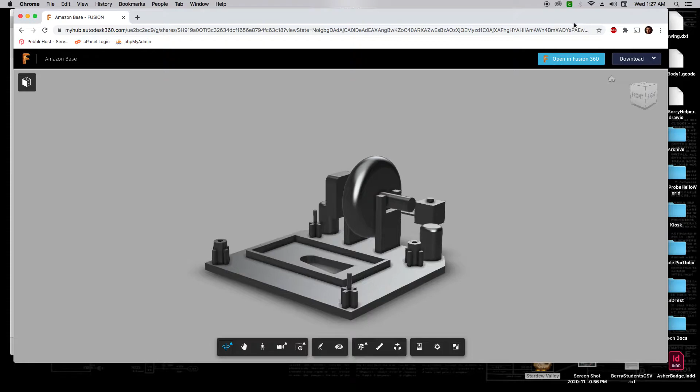Okay, so this is a quick tutorial on how to create a custom mouse body for an Amazon mouse. We're going to do this in Fusion 360, and to get started, we're actually going to go and download a model of an internal clip and hardware for the circuitry that will come out of the Amazon mouse that we're going to be working around.

And so what we'll do is we'll go ahead and click Open in Fusion 360, and this will load this file into Fusion so we can begin to design our body around it. Okay, so once we have this in here, we are going to be designing the body of our mouse around this, and so we're going to start off by creating a form, and we're going to use the box tool, and we will create it along this bottom plane.

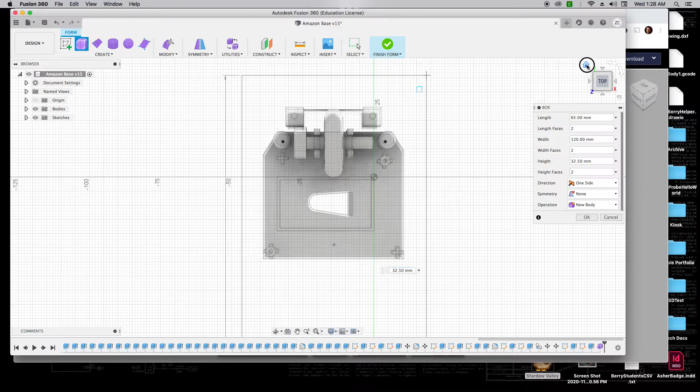And I'm going to try to center it as best as I can, but it may not be perfect, and that's okay. Okay, I'm going to come down here. Okay. And we're going to work with some rough dimensions. So we're going to make this 65 wide, and we can always pare this down, and we'll make it 120 millimeters long. And we'll make this height 32.5 millimeters tall.

Okay. So here you can see we've kind of got the beginnings of our shape here, but we want to understand how it's going to relate to our hardware, and so we're going to do a little bit of positioning around here, and obviously some modification of this overall shape. A couple things we're going to keep in mind: we can see how this kind of curves in down like this. We're actually going to flatten this off, and so we're going to lose a little bit of that height. And we're going to modify this shape to make it a little bit more ergonomic as well.

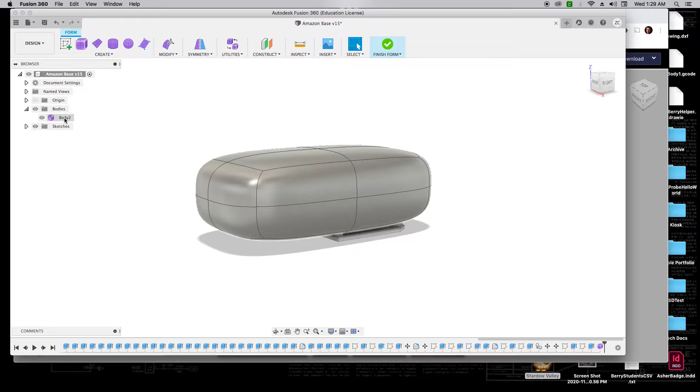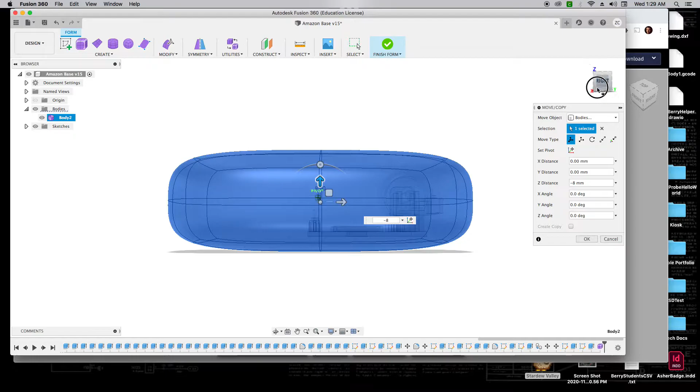So the first thing I'm going to do is open up these bodies, right click here on body, and change the opacity to about 80%, and that's going to show me the relative position here of the object that I'm working with. And so I'm going to move it down a little bit because I want to make sure that I have the internals completely inside. And so I'm going to position this, and again, I want to make sure that this is going to be where I'm going to be cutting it off and making it flat. At the same time, making sure that I've got lots of room on all edges for the various parts of this to poke through. So that looks okay.

Let's make sure we're at least roughly center. Looks like I can move this over just a hair to make it more center. Oop. I actually need to go in that direction. Okay, and that's looking a little bit better there. Okay, so I've got that positioned in a place where I think that's going to work okay.

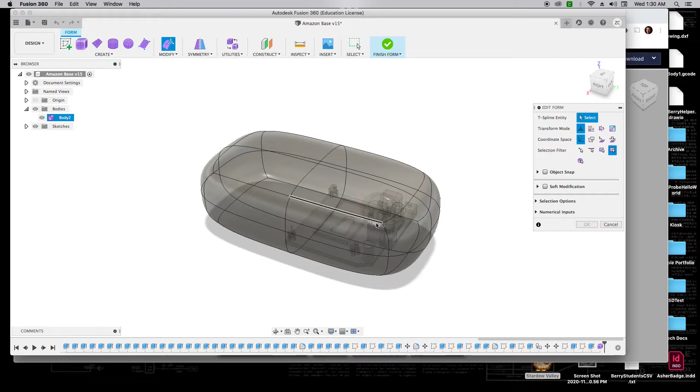Okay, now what we can do is we can go ahead and modify our form. And with this, we're going to begin to pinch and pull along the edges to create a shape that we think is going to work best for us. So you can see I'm going to taper this edge down here, and I'm going to do mine symmetrically. So if I move something on that side, I'm going to move it on that side as well to keep it nice and symmetrical.

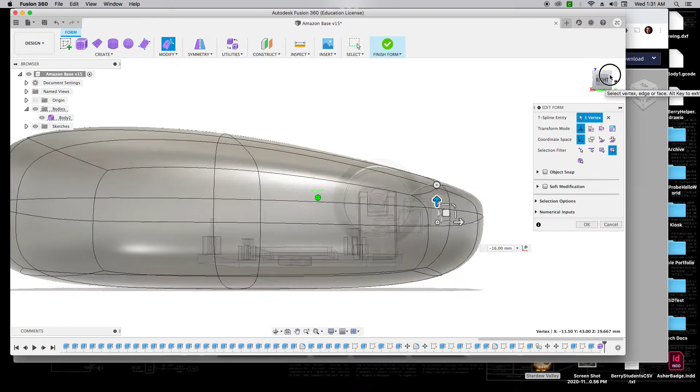Okay, so I'm going to move this down a little bit more, and you can see that the scroll bar on this is pushing through just a bit. Okay, and I want that to be just barely protruding, and I also want to make sure that I'm leaving plenty of space for the various aspects of this mouse to come through. So I'm going to bring that up just a bit more because I can see that there's a piece of the mouse here that's going to be getting close to the edge, and again, I want to make sure that there's going to be plenty of space for that, and also this doesn't have to be protruding an awful lot in order to be effective.

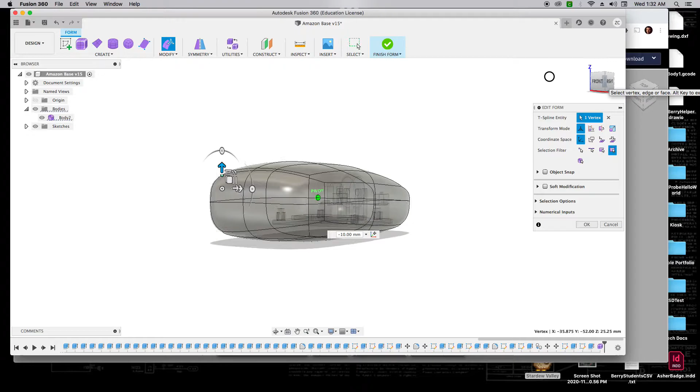Okay, so that's looking okay. So again, just constantly looking around, making sure that everything's going to fit the way that I think it should. Okay, let's take a look at our mouse. So a couple things. I'm going to play around with this, and again, just thinking about various elements of ergonomics and what I think is going to fit my hand best. So I'm going to curve this down and make it sloping. And I'm also going to push this in just a bit and contour it just a bit.

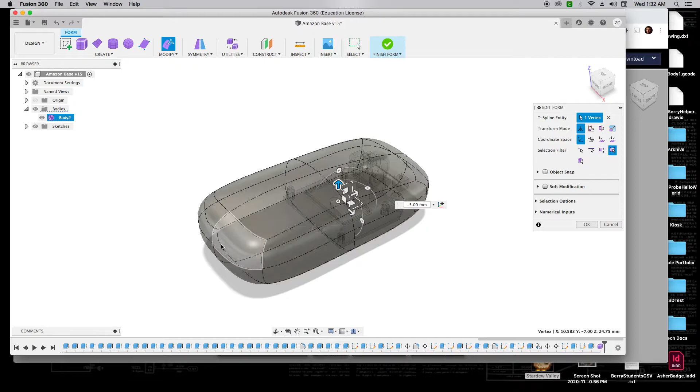Okay. So I'm liking the way that this is coming along. So I'm going to click OK here. And at this point I can finish my form. And here we can see that I've got the overall shape of my mouse. Of course, we're going to flatten off this bottom edge so it sits flat on a desk. Again, you can play with this. You can think about the particular application that you're using and make contour choices based on that. But this is a good basic start.

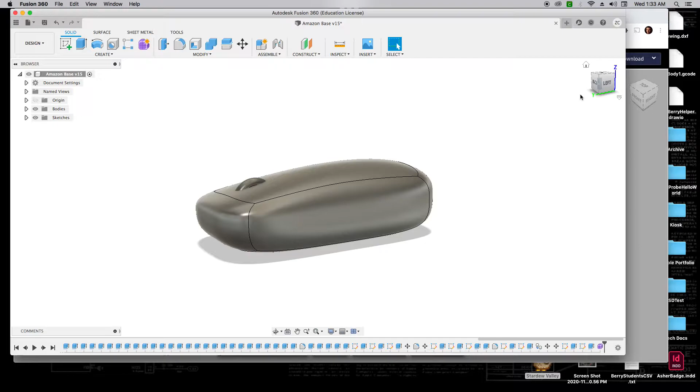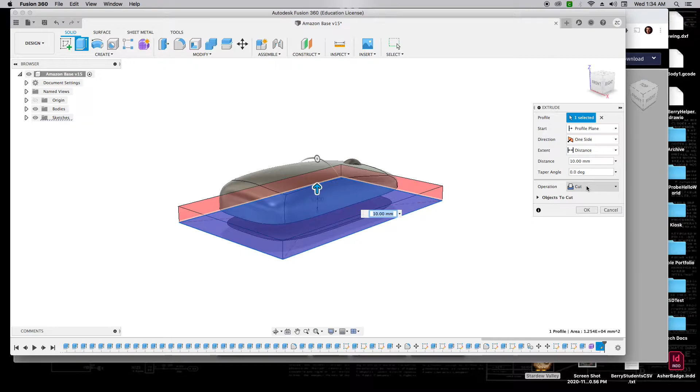So now what we want to do is flatten out the underside of this. The way we're going to do this is by creating just a big old rectangle that's going to serve as a flat base. So we can hit R for the rectangle tool. We can come into here, and I'm going to create a center point rectangle and just make it oversized for this. And then I'm going to extrude it up. And I don't want to cut this just yet. I want to make this a new body because I want to be able to make some more informed, precise choices as to just how much of this I want to cut.

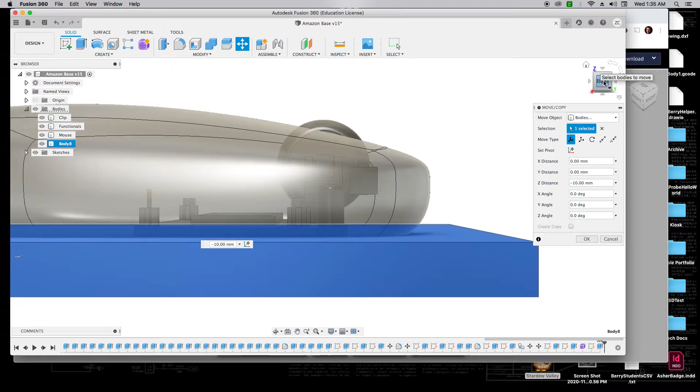So I'm going to go back into my body, this is going to be our mouse. I want to see what's going on the inside, so I'm going to make it a little bit transparent. And I'm going to select here and hit M for move, and move this down a little bit. Really what I'm looking for is to make the base of the mouse pretty much on the same plane as this base here. And we can see that we're actually pretty in line with that right there, so that's going to be a good position for it.

So now I can go to combine, and I can select this as my target body. This is my tool body, and I can click cut, and we don't need to keep the tools, so we can unclick that if it's checked, and click OK. And at this point we can see that we have trimmed the bottom of the mouse, so it's nice and flat, and should sit on a desktop quite nicely.

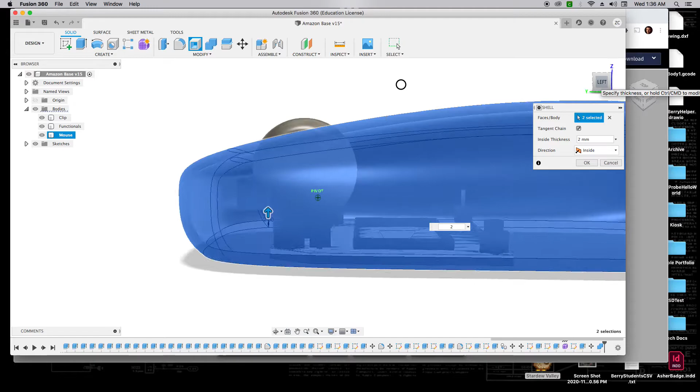Okay, now this is still a solid object, so we do need to hollow it out. We can do that using the shell tool, so I'm going to select both the mouse body and the base, and we're going to shell it. We're going to start thick, let's shell it to 2 millimeters. But as I'm doing that, I want to make sure I'm looking around here and that nothing's going to run into that. And here I can see it does look like this little roller connector is going to intersect with that, so maybe 1.5 will make that a little less dramatic. And so if I click OK, yeah, it looks like it's just clearing it. Okay, so that's good.

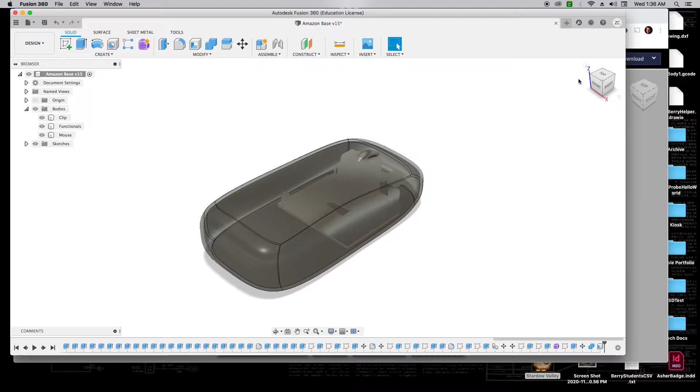So now it's hollow on the inside, but it's not in two pieces. We need to do that. So the next thing we're going to do is create a rectangle that we're going to use to slice this into two pieces, a top piece and a bottom piece. So again, we'll hit our rectangle tool. We can choose our bottom here. And I like to use these center rectangles just because it makes it easy to get it wrapped around. And again, this can be just about any size.

We'll finish our sketch, and I'm going to extrude that up using the E tool. I just need to extrude this 1 millimeter and make it a new body. So again, I'll click OK. Just like we did before, we're going to be moving this, so I'll click on this and click M.

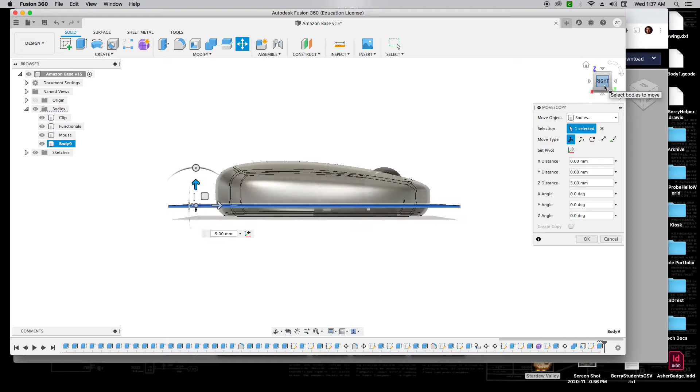And I'm going to be, again, trying to find a good line where I want this to split. Now, one choice that I might make this around is where I want the wire to come out of the front, and we want that to be relatively low, just based on where the circuitry is. And so I'm okay with splitting it right there.

At this point, we can choose to split the body. We'll choose this as the body to split. The splitting tool is going to be the face of our rectangle here. And we do want to have that Extend Splitting Tools option selected. If I click OK, it didn't look like it necessarily did anything, but I can now see that I've got a mouse and a mouse one.

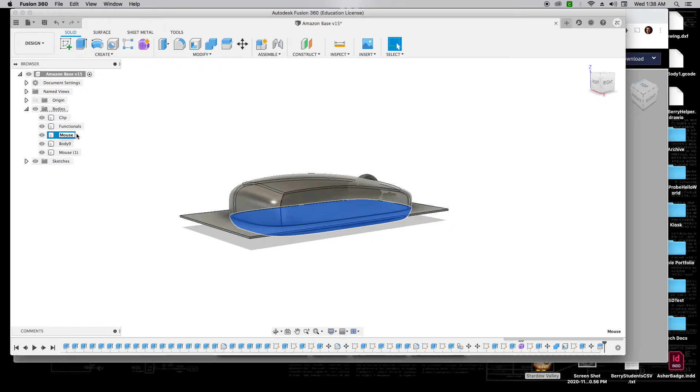If I hover over here, it shows the bottom. So I can change the name of this to mouse bottom, and I can change the name of this to mouse top. Now at this point, I don't really need this anymore. Now I'm going to turn these on. I can see that I've got my mouse bottom. That's what the bottom of the mouse is going to look like. And I can turn on the mouse top, and I've got the mouse top here.

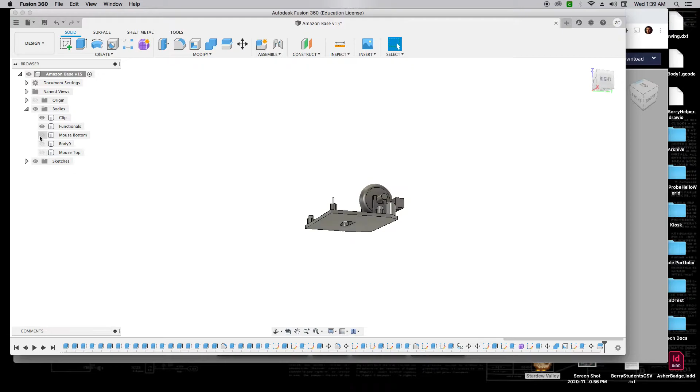So let's start working with our components here. I do want to have the clip part actually merge with the mouse bottom. Ideally, I would like this clip and this mouse bottom to be the same. This little area right here is a window that needs to see through, and you'll notice it's kind of blocked by the mouse bottom at the moment.

So I'm going to turn off the clip so that we're just looking at the bottom, and I'm going to make an oversized hole here that's going to merge with the clip. I'm going to go to rectangle, sketch on this face, and again, a center rectangle. I'm just going to make something that is oversized, but big enough to fit that mouse window through. And so I'm going to hit E for extrude.

I'm going to cut up through the center, and you can see it's just going to make this big, giant hole here. But if I turn the clip back on, it should be okay. It should mostly get filled in. As long as this window is completely unobstructed, then we'll be in good shape.

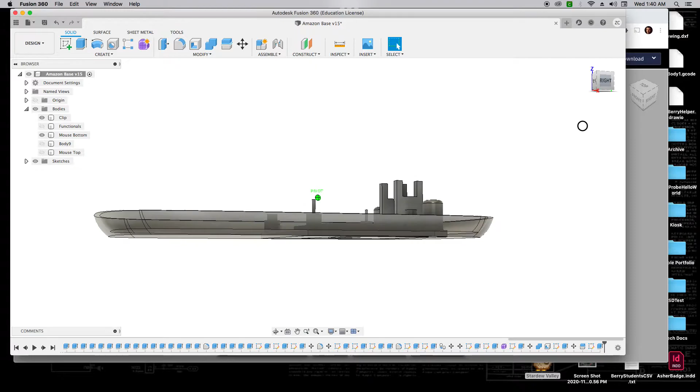Now at this point, we can combine these two together. Again, we'll use our Combine tool and our target body and our tool body. Instead of cut, we'll do a join. If we join those, we should find that they turn into a single solid piece. And at this point, we can go to opacity control, change it to 100%, and that should be the bottom of our mouse, all ready to go.

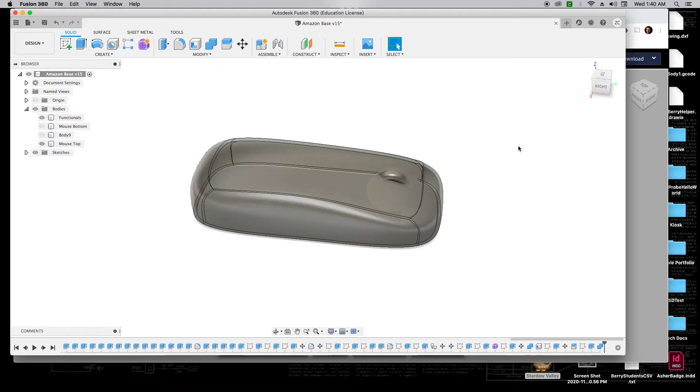That being said, we still have to deal with the top of our mouse and make sure that it interacts correctly with the scroll wheel and the buttons. So let's get started with that. The next thing we're going to do is carve out an appropriately sized hole for the scroll wheel in the top.

To do that, we can use our Combine tool. This is our target body. Our tool body is the scroll wheel. We want to make this a cut, and we definitely want to keep the tools. We're going to be using this stuff a little bit later on. So if we click OK and turn off the functionals, we should see now that we've got a hole that is perfectly sized for the scroll wheel.

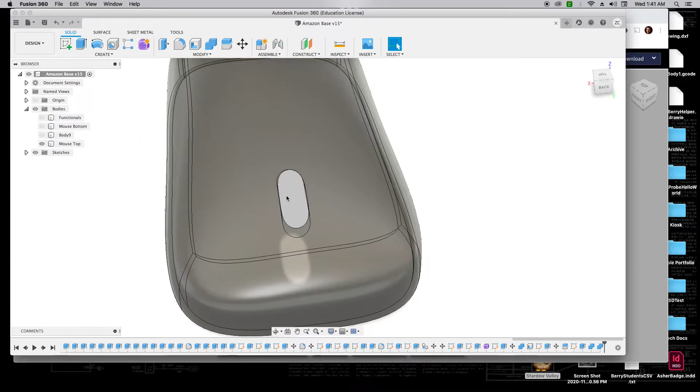However, since that scroll wheel does need to move, we need to open this up a little bit, so it's got a little bit of space on each side in order to be able to not get caught on the edges. And so to do that, I'm going to zoom in here, and I'm going to choose this Press Pull tool, and then come through and select each of these faces, and there are 4 of them, so you may have to maneuver around to find them.

Okay, but here you can see I've got the entire area selected. Okay, and I want to widen this out a little bit. And so if I bring this up here, I'm going to widen mine to, we'll say, 2 millimeters. That'll allow for any kind of small adjustments to be made. And you can always go back if this doesn't print correctly. You can always go back and fix this. But I'm going to err on the side of making it a little bit wider and go to 2 millimeters.

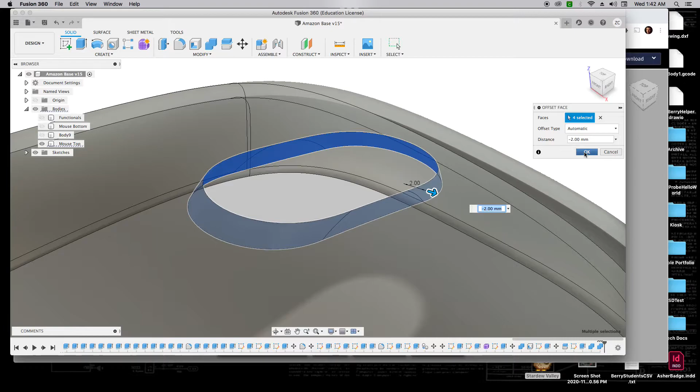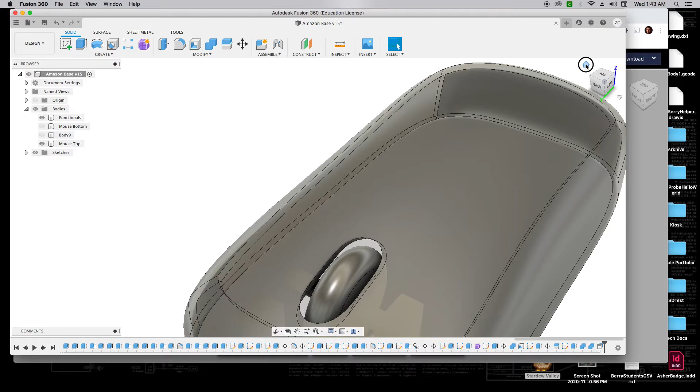And click OK. And so now we'll turn our functionals back on. And we can see we've definitely got a lot of clearance. Well, in retrospect, that's too much clearance. So I'm going to go back and change that up. So we click Press Pull here, here, here, and here. Okay, turn my functionals back on. And I'm going to go negative 1.5. Okay, I'm feeling better about that. So, yeah, I think that looks okay.

Okay, great. Now, at this point, we need to do a couple of things. We can start working on our buttons now. But you'll notice right now we don't have any separation. So if you push on this, it's a solid piece. So it's not actually going to move up or down. And so what I'd like to do is actually split the face of this in a couple areas to create a relief that allows you to push down on just one side of the mouse in order to engage with these buttons below.

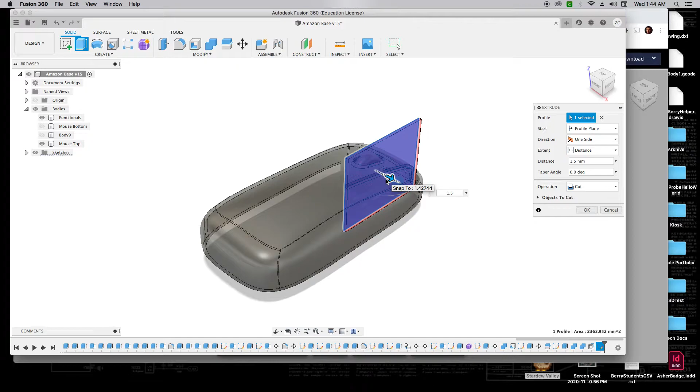So to do that, again, we'll do a couple of small things. I'm going to create a new rectangle. And this time I'm going to create it along this face, going up and down. And I'm just going to make it arbitrarily sized. And I'm going to extrude it. And I need to think through how much I want to extrude it. I'm going to start off with maybe 1.5 millimeters. We're going to create that as a new body.

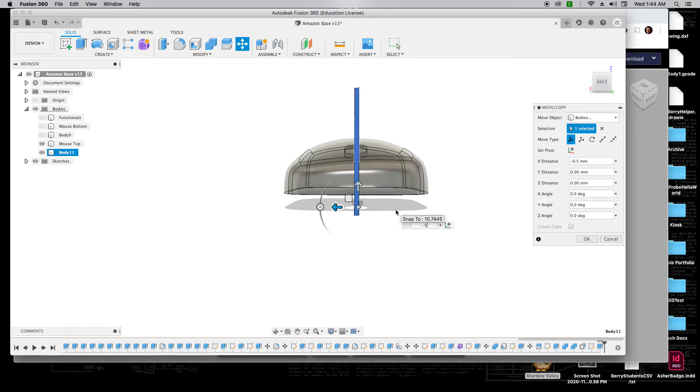Okay. And now what I want to do is position this to just run right along this edge here. I'm going to turn the functionals off for now, but I'll click this and hit move. And I want to get a nice top-down view to center this up. Okay, and I'm going to move it down this way, because what I should be looking for is to split this edge right here. So if I'm looking at it pretty straight on, it looks like I need to move it just this way, just a hair. Okay, negative 0.5. There we go. Okay, so I'm liking the way that looks.

Okay, so now what we can do is, again, we can combine. Here's our target body. Here's our tool body. We do want to cut, and we don't need to keep this tool, and so we can click OK. And at this point, you can see that we've split it along this edge, and that'll allow some separation between the left button and the right button. Now what we need to do is create a relief along the sides so that, again, this button can push down a little bit.

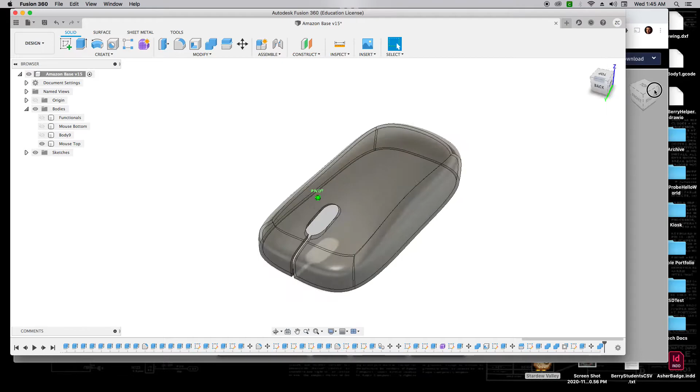So once again, we'll create a rectangle, and I'm going to create it along this face. Again, just draw it out to an arbitrary size, and we're going to extrude it out. In this case, I'm going to do this one 1 millimeter. We'll create that as a new body, and click OK, and we're going to move it.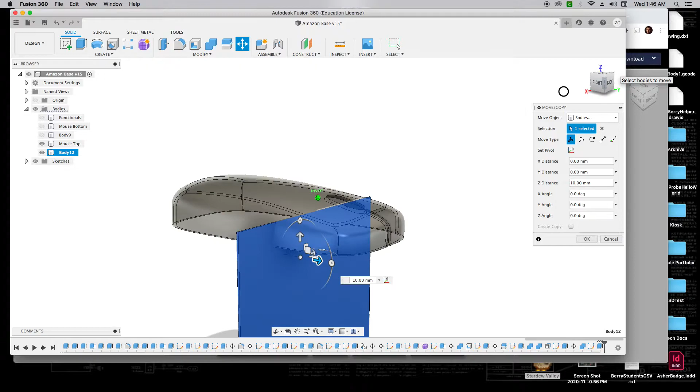And we need to decide how far in we want to cut. It doesn't need to be super far in, but we need to decide how far up and how far back from the front. So I'm choosing mine to cut right about here. You can look and see how that looks. Yeah, that seems to be okay.

I think that'll give it enough flex. So again, we'll combine our target body, our tool body, and cut. We don't need to keep the tools. If we click OK, you can see we've made these little relief cuts so that when you push down on this, there's enough flexion to engage with the buttons below.

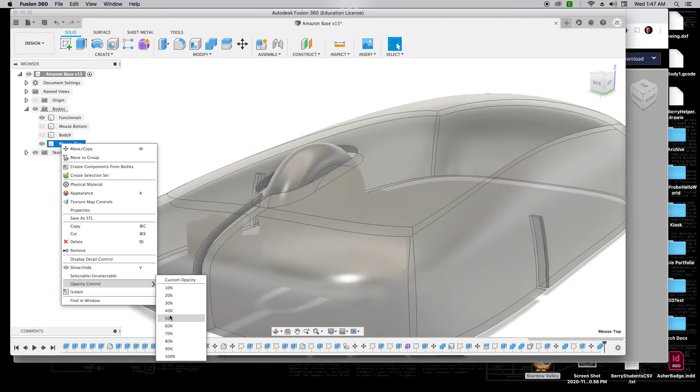Okay, now at this point we need to add some geometry to actually hit those buttons down below. So we're going to turn the functionals back on. We can see, if we look through the surface here, I'm going to decrease the opacity even more, to something like 50%. We can see that you can push down all you want, but it's not actually going to hit this button too much.

We need to create some geometry there that will allow it to, almost like a little finger coming down from the top, to actually push on the button. So to do that, I'm going to turn the mouse body off for now, and extrude the tops of these up. I'm just going to pick an arbitrary number, we'll say 15 millimeters, and create that as a new body, and click OK.

At that point, I can turn off the functionals and turn the mouse top back on, and this allows me to see whereabouts those little fingers need to come through. But obviously they're poking up through the body of the mouse, and that's not any good.

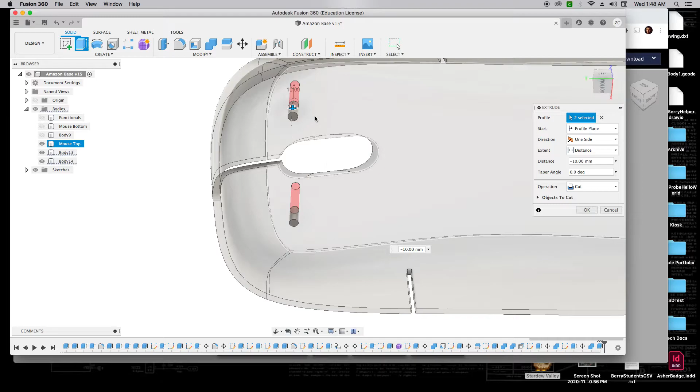So what we're going to do is extrude these back down. I'll hit E for extrude, and we're going to trim them down until they are inside the surface of the mouse. They need to be below the top surface, but also above the bottom surface of the mouse here. So if I click OK...

Oops, hold on, I did not want to cut. Let's try that again. So, here. Okay, so we're going to lower them down again. Okay, that looks like it's there.

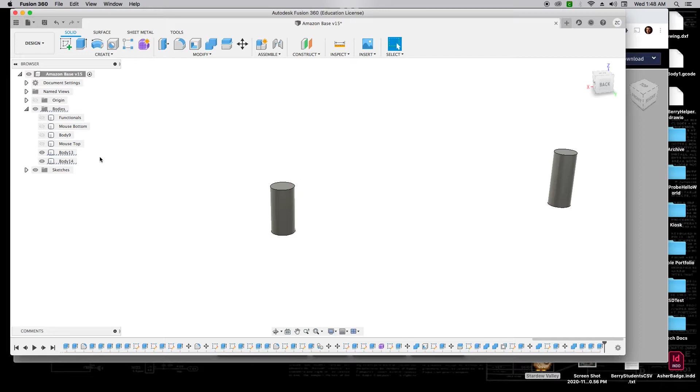We need to turn the mouse top off for this. We'll click OK. Now we can turn the mouse top back on. Okay, and it looks like, if I'm not mistaken, that one's still poking through just a little bit, and we don't want that. So I'm going to do the same operation again, and bring this down a millimeter, and we'll bring this one down a millimeter too, just to see if that works out nicely and evenly. Put the mouse top back on.

Okay, I can see that one's intersecting. Let's see, is that one intersecting? Let's look on the inside. Yep, looks like they're both touching. Oh, looks like they're both not touching.

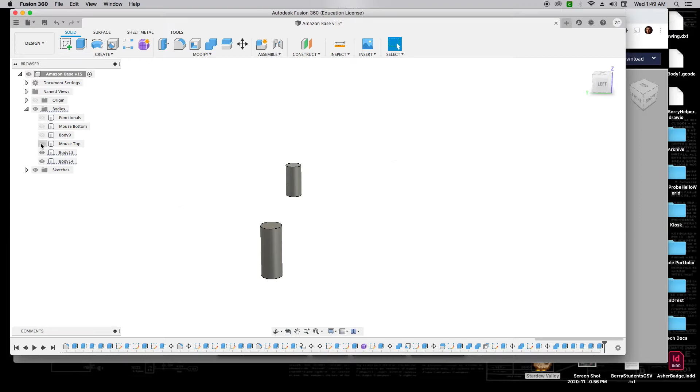Okay, so we need to raise this one up just a bit more. Looks like it was a bad idea to bring that one down as well. Okay, let's try that again. Okay, looks like we're back in business.

So now what we can do is go ahead and join these. Again, we'll click Combine, we'll click our mouse top, our tool bodies are here, and we want to join them up. Okay, and now they are connected, so I can turn the opacity on this back to 100%, and I can see that I have my two little fingers there. I am going to increase the size of these.

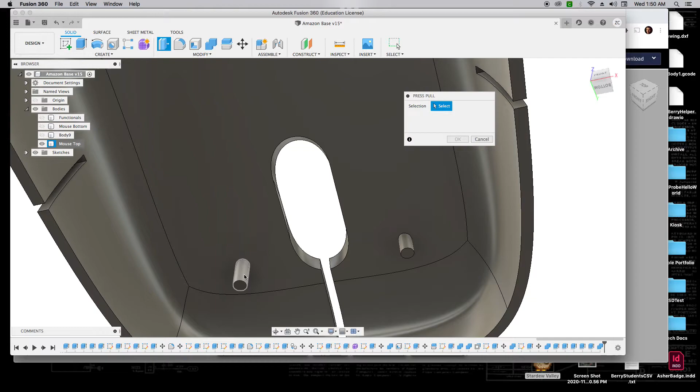To do that, we're going to use the Press Pull tool. Again, I'm going to select the outer edges of these and just widen them up a little bit. Let's go an additional 1.5 millimeters. Okay, so that's going to make them a little bit chunkier so that it's really hard for them to miss.

And so now if I click on the functionals and I'm going to drop the opacity, what I should see is that when you push down on those, you can see those little fingers are going to engage those buttons right there. Okay, so that's looking pretty good there.

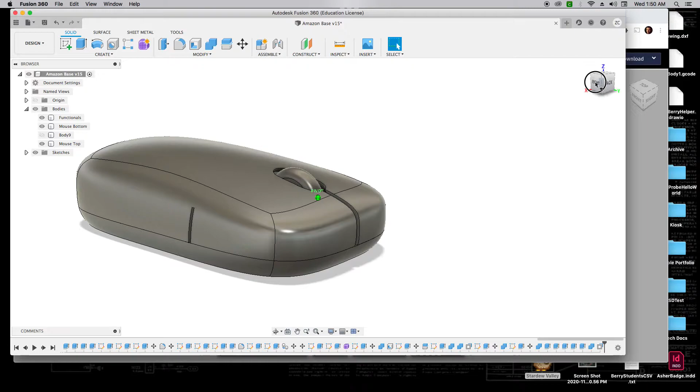Okay, now at this point, we're going to bring our mouse bottom back in, because what we'd like to do is carve some geometry here that's going to allow the cord to pass through. So to do that, we're going to model that cord just a little bit. I'm going to use the circle tool on this plane.

And again, I'm just going to create a circle. This time, I'm going to measure the cord on my mouse, and it looks like that's coming in around 3 millimeters. So that sounds good. Let's make it 3 millimeters, and I'm going to extrude this out, again, to kind of an arbitrary length.

Okay, now at this point, I want to move that. So I'll choose this one, click M, and I'm going to bring it forward. Let's bring it across, forward still. And I'm going to put it in the spot where I ideally would really like my mouse cord to come through. Okay, so maybe down a little bit.

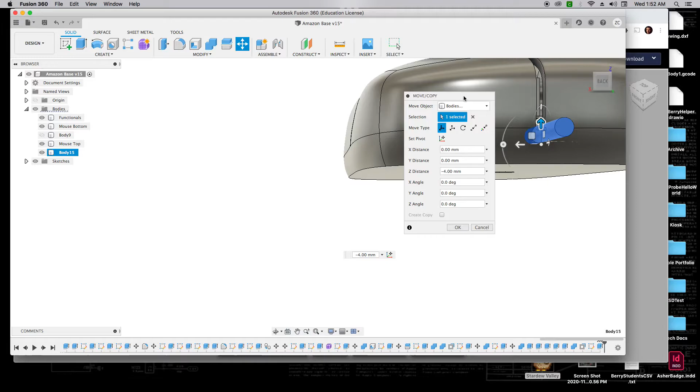Okay, bring it down just a bit more. Okay, so I like that right there.

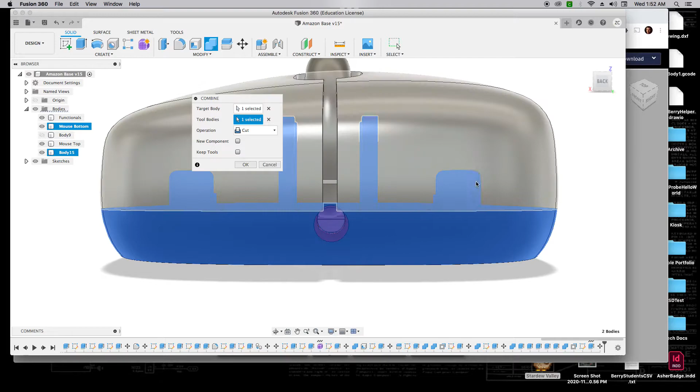Okay, now at this point, I'm going to have the mouse bottom, and we're going to cut that away to make a nice little circular hole there, and click OK. And so now we can see how the mouse cord's going to come right through there.

Now again, we've got a little bit of a problem. Now that we've got both of these together, we can see that when you click down on this, there's actually no room for this bottom finger to flex at all because it's going to hit the bottom of the mouse. But again, that's okay. We can turn off the bottom of the mouse.

And what we can do is, using the press pull tool again, we're going to select this face and this face, and we're actually going to cut up into it 1 millimeter. So if we click OK, then we turn our mouse bottom back on. Now we can see that there's actually a little bit of space here for when you push down on this for it to actually click down.

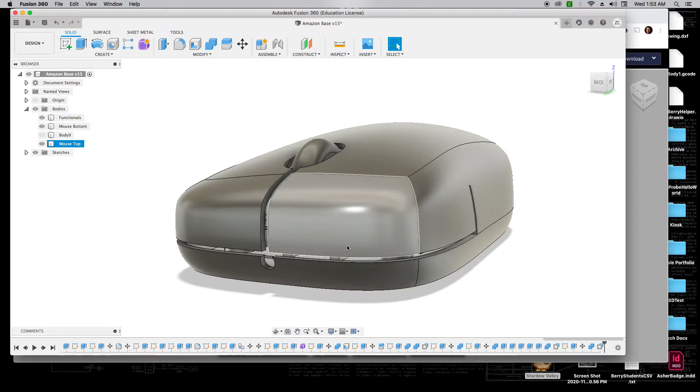Okay, so we're getting pretty close here. The only thing left to think about is how do we actually go about attaching these two things together. There's lots of options that we can use. I'm going to use just some small clips as well as a screw. And so we will work on making those two work together, and we should be in good shape as soon as we're done with that.

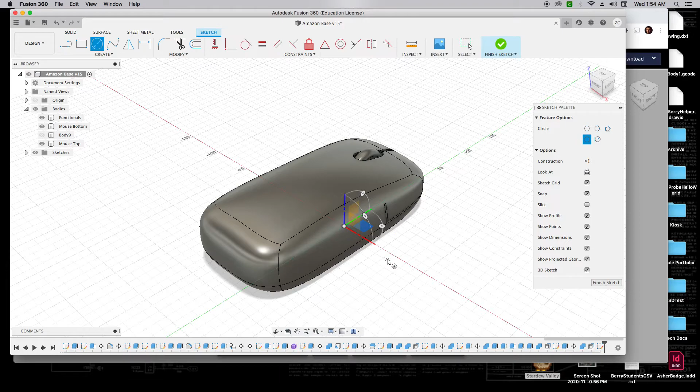Okay, so we're going to come over here. The first thing we're going to start on is with a screw, and we're going to run the screw right through the base here, and then we'll use some clips to keep everything nice and centered. So to do that, we're going to create a circle on this base plane, and that circle—we know that the screw we're going to be using has a 3 millimeter diameter, so I'm just going to double that for the post that's going to hold it together.

And so we'll make that 6 millimeters, and again, I'm going to extrude that up and make it of just an oversized length. We'll trim that up here in just a second, but something that's definitely going to run the full length.

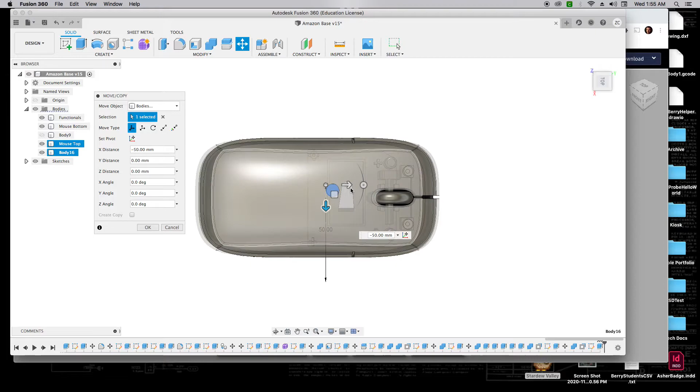Okay, once again, I'm going to move the opacity of these. I want to be able to see where I'm positioning this and where it's going. So I'm going to come over here to the mouse, and I'm going to move it here. I don't want it to interfere with anything going on this side, and so I'd really like it to be hanging out here in the back. It can be relatively close, but we just want to make sure that it doesn't get in the way of anything that's going on there.

So that looks like it's in a kind of good solid spot, so we can go ahead and click OK. I do want to make sure that it is positioned well here. Okay, good. And I'm going to just drop its height down just a bit.

I'm going to do that with the move tool. I'll select that, and move it down just a bit, so it's below the surface here. Okay, that's looking good. We can see it's actually kind of poking its way through there, and that's okay. We'll take care of that in just a moment.

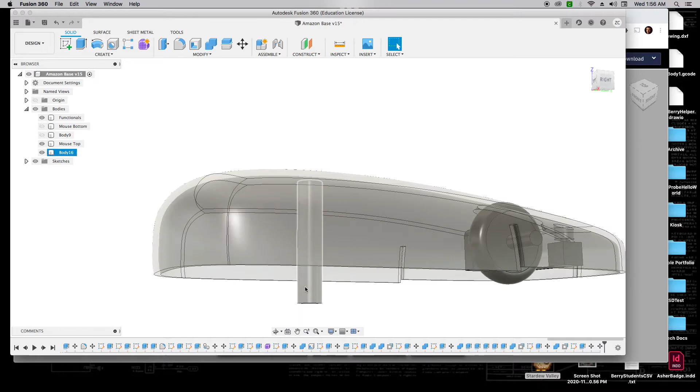I'm going to turn the bottom of the mouse off, and click extrude, and bring this up about this much. We'll click OK, turn the mouse bottom back on. Okay, there, and we can see that it's not actually touching that space anymore, and that's okay. That's exactly what we want.

Now at this point, what we want to do is duplicate this and move it down, because we're going to have a post that's going through the top and a post that's going through the bottom. So for this, we'll click here again, click move, and we're going to move this down.

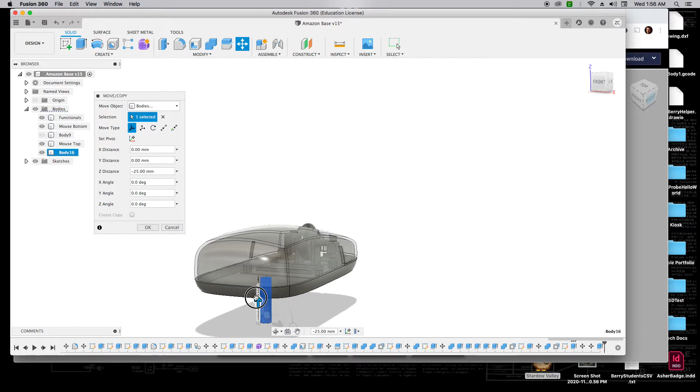Actually, we're going to try that again. You can click this body, click move, but this time I need to create a copy because I actually want two of these. Okay, and this time I want to position it so that they are just touching each other, and that's good right there.

Okay, so now we've got one that's on the bottom. We're going to trim this up in just a second, but we're liking the way that's looking. So at this point, I'm going to go ahead and trim this off. This one looks like it's in good position and ready to merge with the top one there.

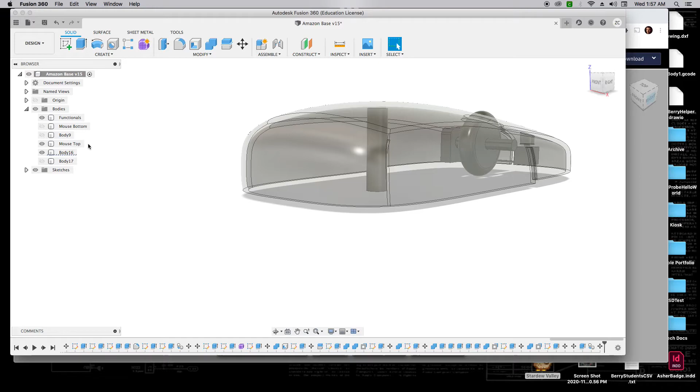So what I'm going to do is turn off the mouse bottom, turn off this one, and we're going to merge these two together. So I'm going to combine, this is our target body, and we're going to join those together so that they'll be just one big solid piece of plastic now. Okay, but let's go ahead and turn on our mouse bottom and mouse top.

Now I need to trim this one up, so let's take a close look there. I'm going to hit extrude, and start trimming this one up to the bottom. And if I click cut, okay, it should be flush with the bottom there. And now what I can do is go ahead and look at the overall size.

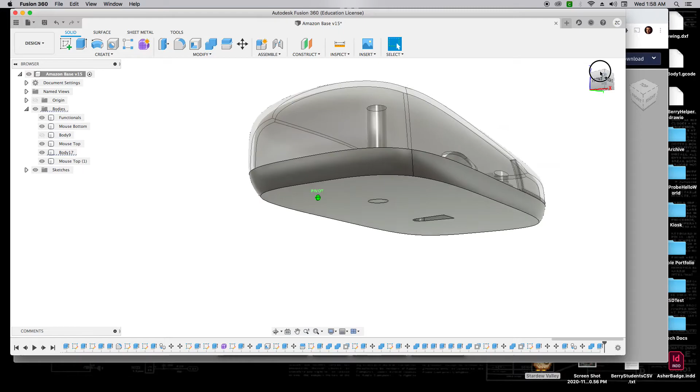Actually, I'm going to trim this up just a little bit more because it turns out that the head of the screw is 6 millimeters, which happens to be the diameter of this, and it's 2 millimeters deep. So I'm going to take that in 2 millimeters and cut into both the head of where the screw is going to go into and the base of this mouse, so that the screw can recess into the base of the mouse.

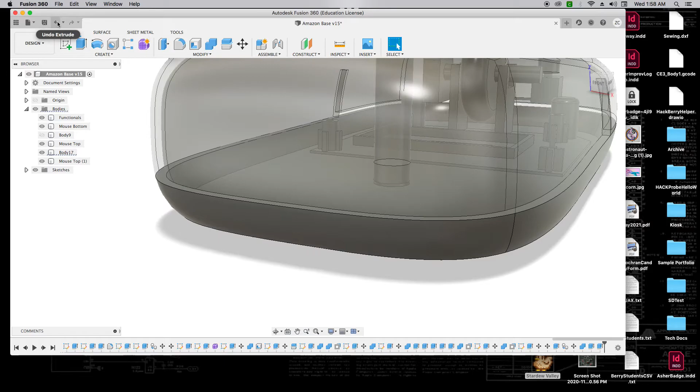Okay, so now at this point we can see that we are kind of through here, but we do have a small issue in that it doesn't look like they are actually touching anymore. Let's go ahead and take a small step back, and in this case let's extrude that up, but just go up 1 millimeter, and maybe that'll be a little bit better. There we go. Okay, so they're still connected to each other.

Alright, so let's join these up together, and turn off the mouse top. Oops. There we go. Oh, don't need that guy. Did these not join together? Let's try that again. So, combine, mouse top. Why are those two separate pieces?

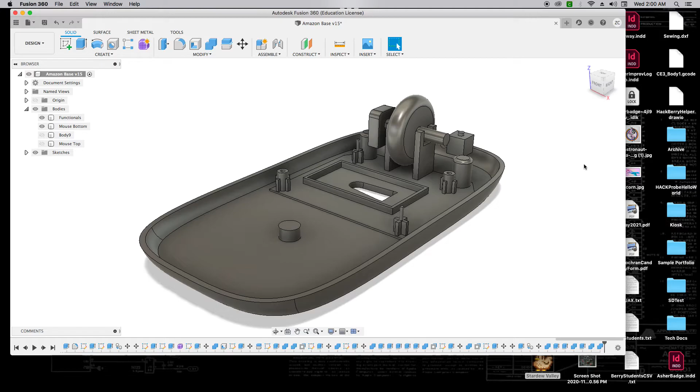There we go. Looks like there wasn't enough overlap there, so we were able to get that fixed up. Okay, so if I turn that off, and we bring this back. Okay, and now we want to combine this with the mouse bottom. And so if we do that, we can click our combine. And now we have a screw area for our mouse. Okay, this is looking good so far.

Now we've got one more thing that we want to do here: we want to create a hole for the screw to actually feed through. So I'm going to turn the mouse top back on. We're going to create a circle, and this time we're going to create a circle along this face. And you'll notice that it's going to let us go right to the center point. And we're going to make this hole 2.5 millimeters in diameter. That'll leave enough material for the screw to really bite into it.

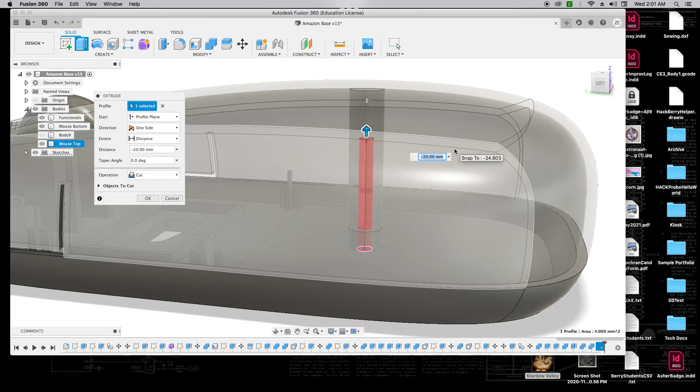And we're going to extrude that up a certain amount, and let's go ahead and take it in, we'll say 20 millimeters. Okay, and what that does is it cuts into both of those materials so that we can screw them in together, and it'll hold it tightly in place. Okay, so far so good.

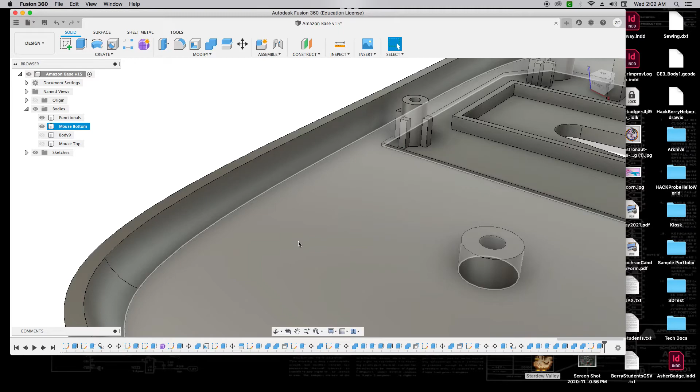We're going to go ahead and make our 100% again. Okay, and the last thing we're going to do is add a couple of maybe small brackets along these edges that are going to allow us to clasp into the top part of the mouse just to keep things from sliding around. And so to do that, we're going to follow this contour a little bit, and see if we can bring this out and create some geometry that's going to move up, that's going to allow us to hold it into place.

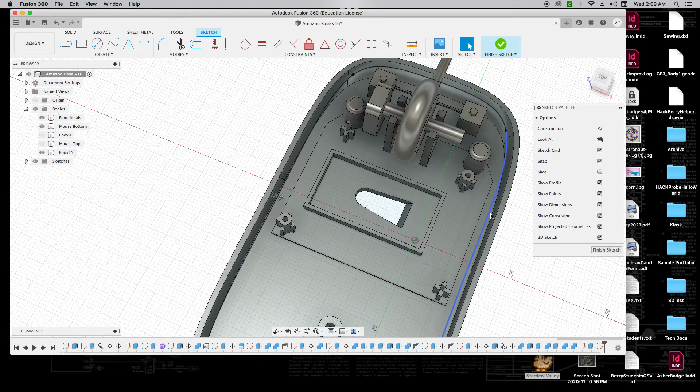But what we're going to do in this particular case is sketch a line. So we'll hit the L tool, and we're going to select this face here. And we're going to come up to our offset tool, select this interior line here, and offset it inside 2 millimeters. And at that point, we can hit our extrude tool and select this interior face.

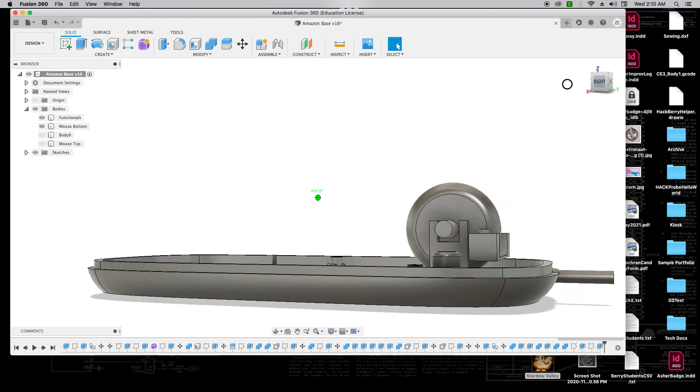And what we would like to do is a symmetric extrude, and let's see what 2 millimeters looks like in either direction. So it's going to come down into there. Okay, and I don't see that it's going to cause any real issues, and so we'll do a join, and it's going to add this little lip around the edge that we'll be able to engage our print with fully. And so we'll click OK there. So far, so good. What we want to do, though, is roll this edge a little bit.

Let's turn our mouse top on and see if that's going to cause any significant issues. Oh, that looks okay so far. So we'll turn our mouse top off again. And what we want to do is fillet this edge. So we can click this little fillet tool. We can click the edge here, and let's see if we can round that just a bit to make it really easy to engage with.

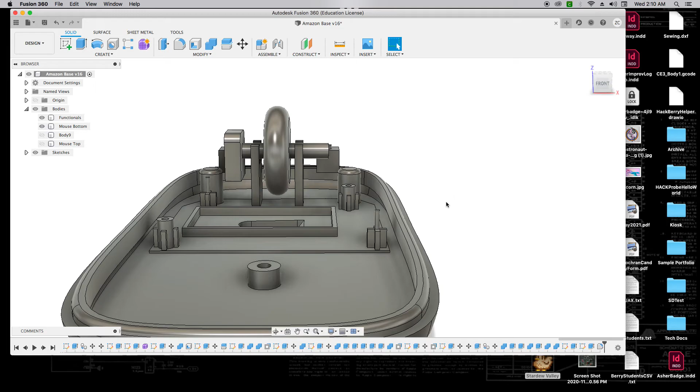So, okay, I'm going to give it a 1 millimeter fillet along that edge, and you can see how it's going to roll that edge just a little bit, and that'll make sure that it slips on nice and easy. We're also going to fillet this other edge as well.

Make sure up there. Yeah, so this hard edge as well. And if we fillet that, oh, looks like it's grumpy about that size. Let's try 0.25. Let's try 0.75. There we go. Okay, so I'm going to fillet it at 0.75. And it's going to create this nice little round edge going all around that we'll be able to kind of fit that into. Okay.

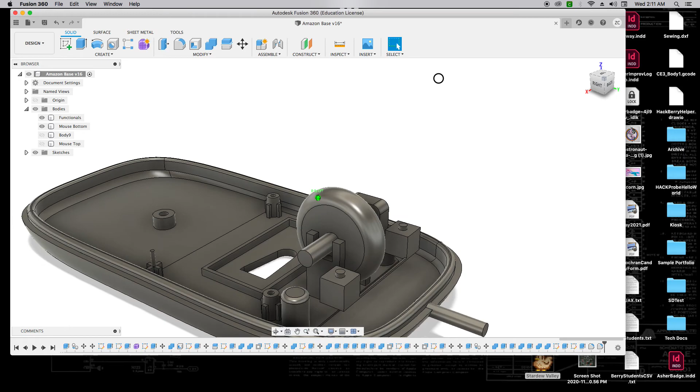Now, at this point then, we want to go ahead and we want to finish this cut that we've done here. But we need to modify it a little bit because it's going to need to cut through this new edge that we've added here as well. And so let's go ahead and we're going to change the position of this. So let's see, that's our... this up a little bit. Let's assume we can't. Oh, okay. Let's go ahead and cancel that out.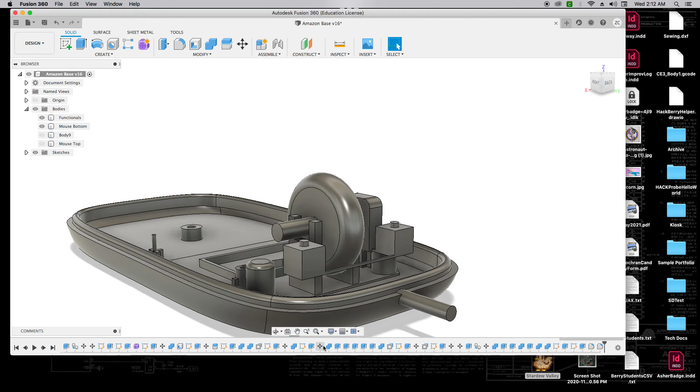Alright, let's go see where we made this, and we can just remove it from our timeline altogether. Let's see. So, bring this around here. Again, we're just kind of searching through here. Aha, okay, so there's the extrude. Okay, so let's go ahead and delete that. Good, okay, so now we have it.

Good deal. All right, so now we should be able to come and select this and now we can go reposition it, just like we did before. So, good little editing trick anytime you make a mistake. That's one of the really clever things about the software, is that it lets you go back and fix mistakes that you make.

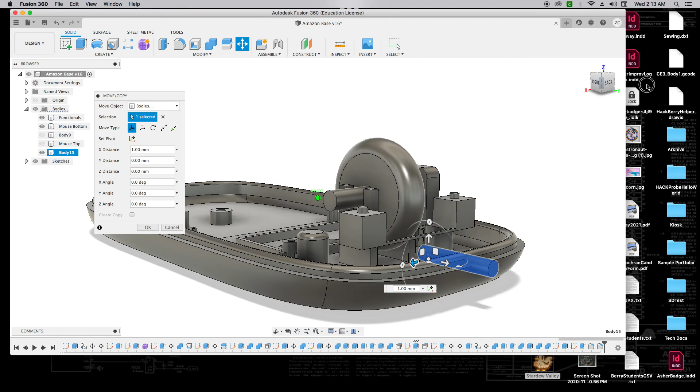Okay, so looking at that, let's make sure it's actually cutting through that we want. Make sure it's actually cutting all the way through. Even if it's just a little bit, that's okay. Okay, we put the top back on. Yeah, I think that should be cutting through enough. Okay, so what we're going to do is I'm going to bring this mouse top back on, and we will do our combine.

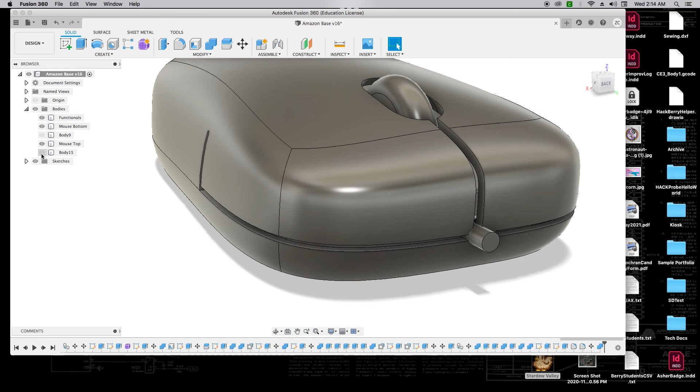Our target body is going to be the mouse bottom. Our tool body is going to be here. We do want to keep the tool this time because we are going to kind of use it to carve up that piece just a bit. But if we turn off this, oh, we still see it there. Why do we see it there? Because we didn't cut. Let's try that again.

Okay. Combine with mouse bottom. This. We want it to cut, and we do want to keep the tool. And we click OK. Good, okay. So now we can see that it actually cut through that edge there. Very nice. All right, one more time. We are going to bring it back.

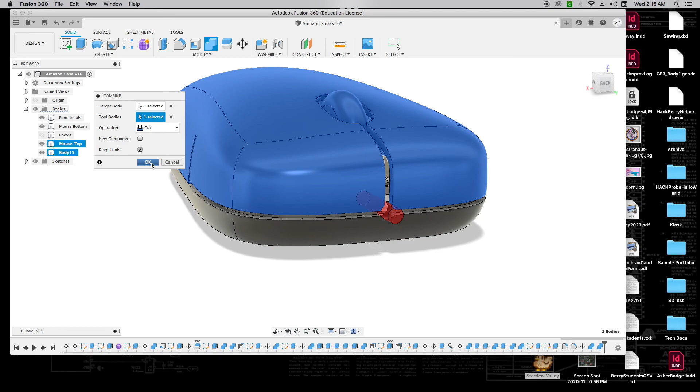We're going to combine. We're going to do it with the mouse top this time. And here, we're going to cut through. We don't need to keep the tool anymore because we're done with it. And here, we can see that it cuts all the way through there. Okay, so that should allow the cord of the mouse to pass through and hopefully not get caught on the buttons as they are clicking.

We'll see. Okay, so you may notice that I've got my geometry a little bit higher on this side, and that's because that's where the hand's going to kind of naturally rest. This is a right-handed mouse, and so it's going to kind of naturally fall along this edge with the big pointer finger here and the smaller fingers along this side.

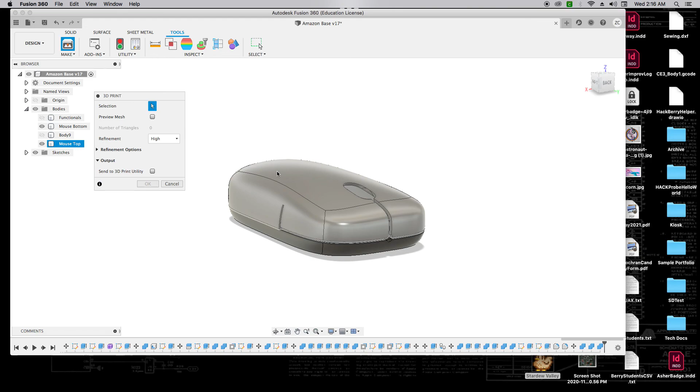So at this point, we're going to go ahead and save if you've not saved several times already, which you should have. And we're going to go ahead and break this into pieces that can be 3D printed. So we're going to turn off our functionals here, and we're going to come over to Tools. We're going to go to Make. We'll select this top body. We don't want to send to a 3D print utility, so if that's checked, go ahead and uncheck that.

And we're going to call this mouse top. Okay, and that saves out. Okay, and then at this point, I can click it again. I'm going to select mouse bottom, and I will save it as mouse bottom. And that is our completed mouse. So at this point then, we would 3D print it, assemble it, sand it, and see how it works. And that's it.